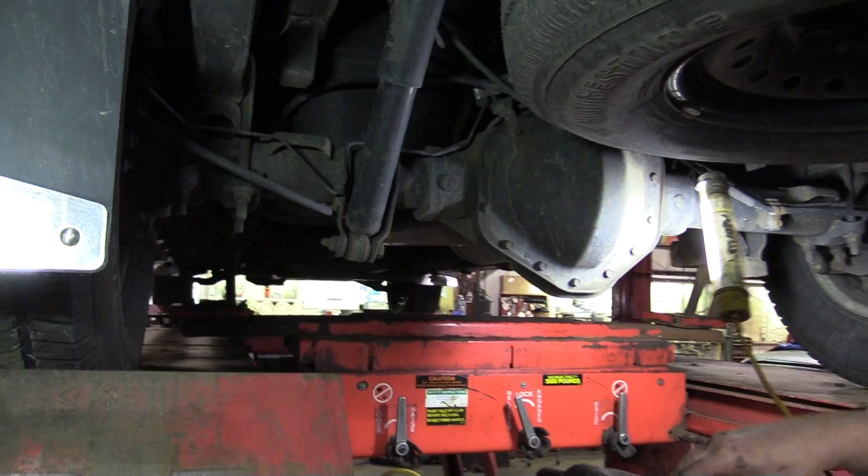All right, so we're knocking the rear shocks off first. Then the plan is we're going to jack up under the leaf spring itself to just raise it up off of the top of the rear axle.

We've had come-alongs before. When I had aluminum lifts on my Blazer, it rotted away from the steel. I went to give it gas one day at a red light, and the tire went right up into the quarter panel, and it was hard to get apart. I had to get a come-along and pull it back forward, you know what I mean, to get it together. So the less it moves, the better.

But we have to reuse these shock bolts too, right? Yes, okay.

They've all come out pretty well. Yeah, everything's been pretty nice. It seems to have a little dead spot. The spare tire's in the way a little bit.

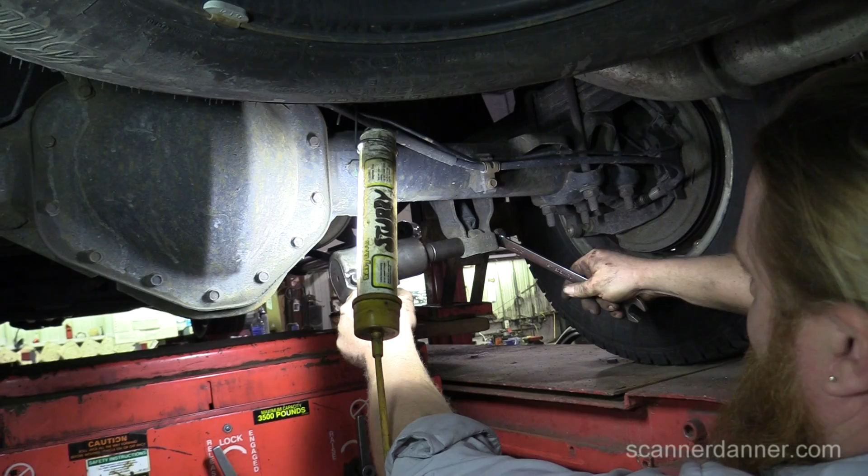I'll let Paul get the hard ones. The ones up top? Yeah. No way, I'm cameraman.

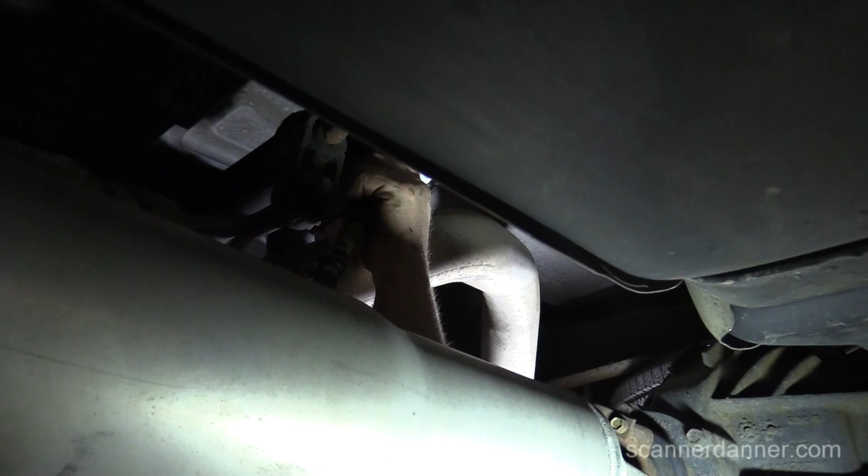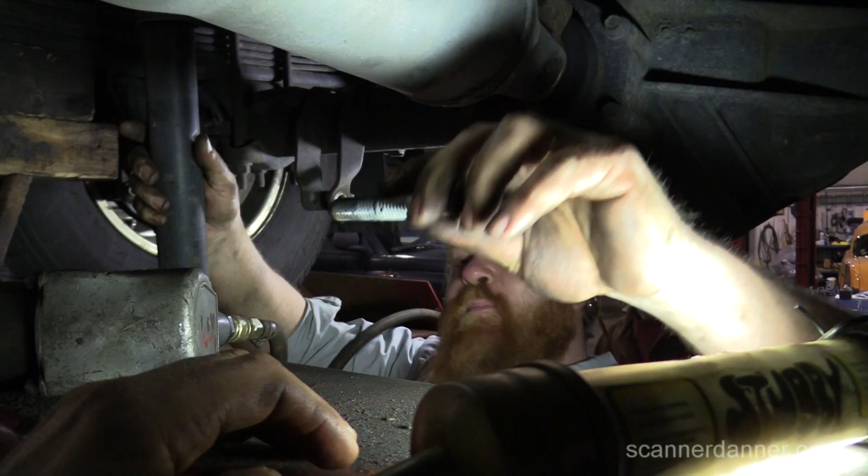I would hate to do this in my driveway. You know how long you'd be wrenching up there, especially with that much thread. Yeah, but your truck's not really that rusty.

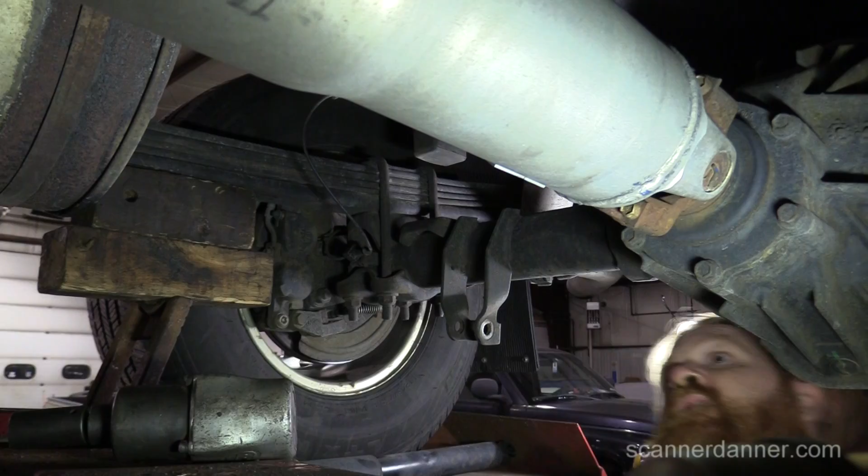Well, I've been treated with a suggestion from a friend of mine, which is you mix linseed oil and diesel fuel, and you spray the whole undercarriage before winter. I only did that once so far. Linseed oil? Yeah, linseed oil, it's like a wood oil treatment. Can you see it? Yeah, kind of, I can see you contorting yourself. There's dirt falling in my eye.

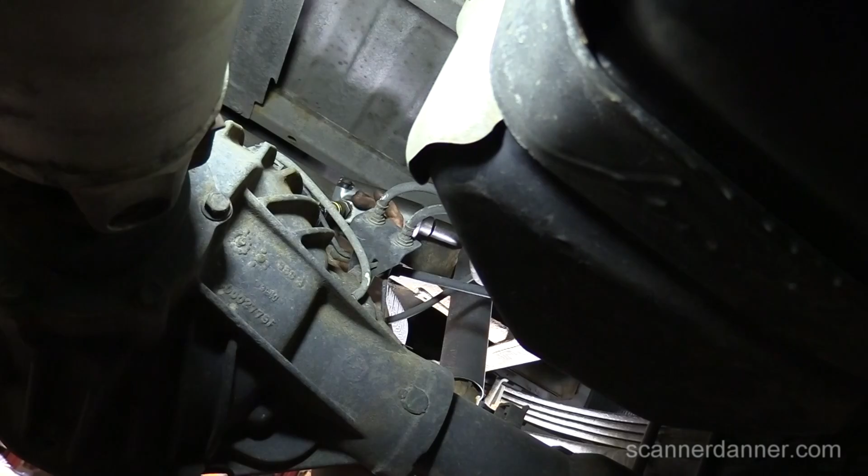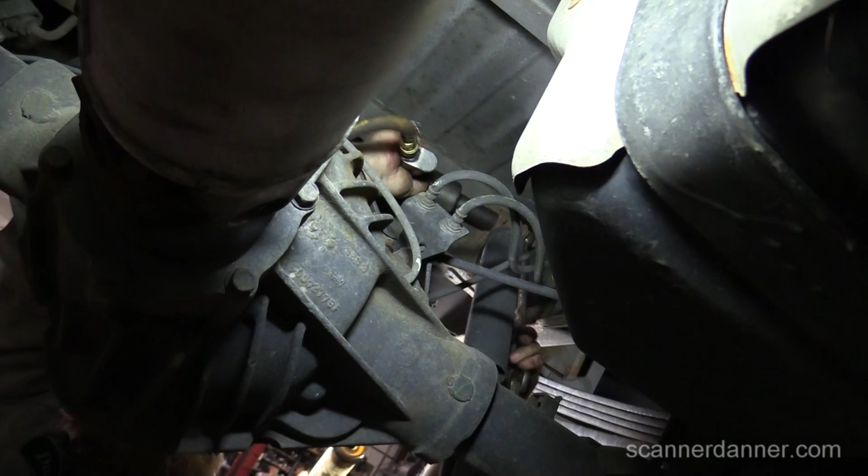You're very skilled. Yes. If I could squeeze that. Sweet, yeah, I'll let you put them in then. How's that? Nah, you're doing such a good job. There you go, but look.

Yeah, Chevy has dust boots on there. Yeah, but they're open at the bottom. Oh, they're not the bellows. So the difference is the bellows, you got to use those. I gotcha, yeah, they're too tight. Yeah, they keep the moisture out.

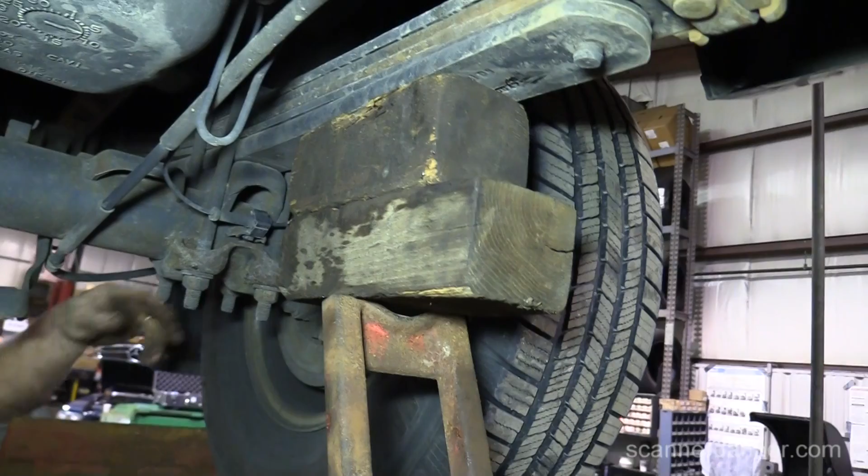So next step, again, you can see the setup we have here. We're going to do one side at a time. We're going to take the weight up off of the spring. You said you wanted to block the tire so it doesn't move? I'm just going to put the wheel chocks. Yeah, we'll start with this side over here, since I have them over here, just so nothing rolls, hopefully.

You never know. But I'm curious too, before we put that block in, can you give me a tape measure reading on that block? I know it's tapered. Just curious, because it lists this as a 3-inch lift kit, and I'm pretty sure those are 2-inch blocks for the back. Can you see it over here?

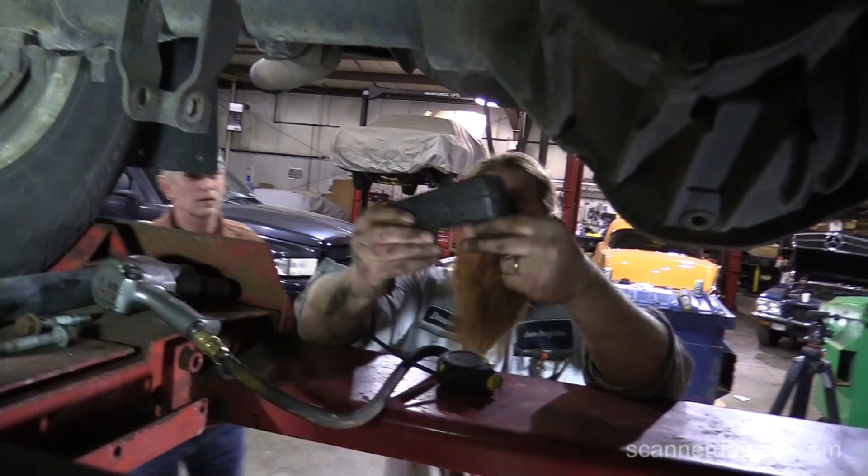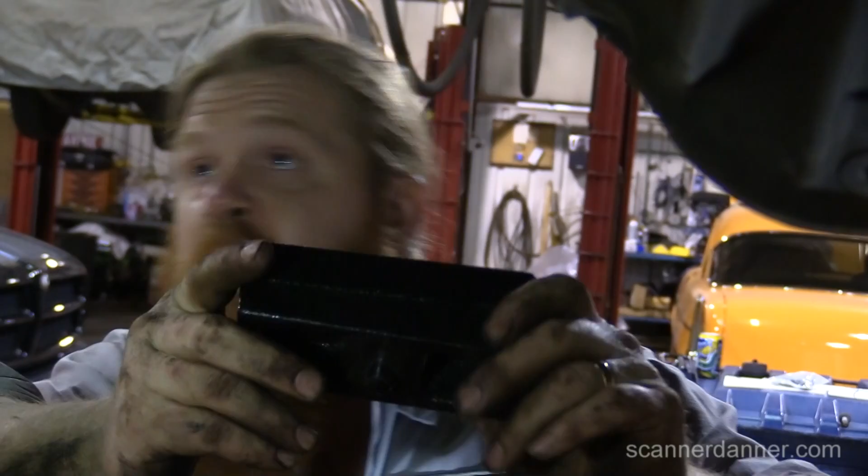Can you see good light? See how it's tapered? So I'm assuming we put them in this way so the rear end will roll up. Correct, flip it. Wouldn't it be the pinion goes down? Yeah, because you're going to have the hole, and the through bolt, the center bolt, and the leaf springs. So the narrow end goes toward the front of the vehicle, that'd be my guess, right? We'll check for sure, but yeah, because when you pinch it, it's going to roll - that's what we want, which fixes our driveline angle.

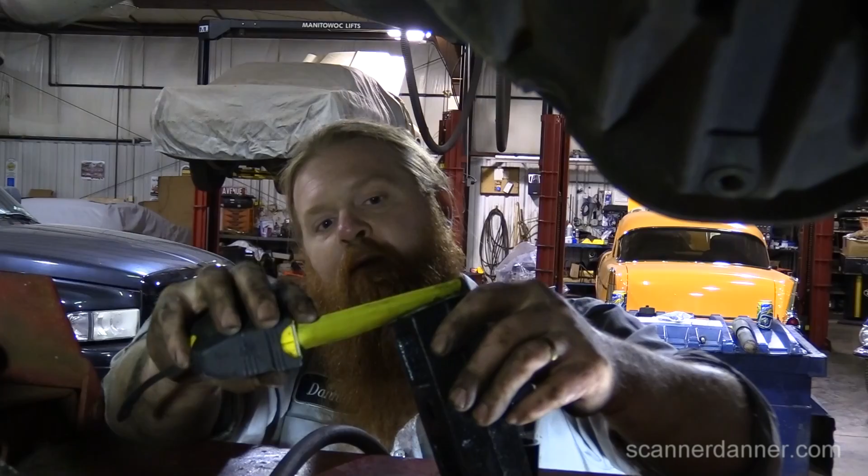So what you have here is on the short end, I'm showing 2 inches. And then maybe 2 1/4 - it's not even that much of a difference. Okay, if I get all the way to the end, I'm at 1 3/4. And on the big end, I'm at 2, maybe 2 1/8. So it's a 2-inch block. That's what I thought, and they call it a 3-inch lift kit, but it's 3 inches in the front and 2 in the rear.

See, we got new U-bolts. New bolts and everything. I don't know if they're going to be washer - we got washers too. We have all new hardware for the rear.

I remember doing U-bolts on my old Power Wagon in the driveway in the cold. Do you remember that? With a wrench. We weren't even old enough to drink either, we were just dumb kids. I would have done better with some alcohol that day.

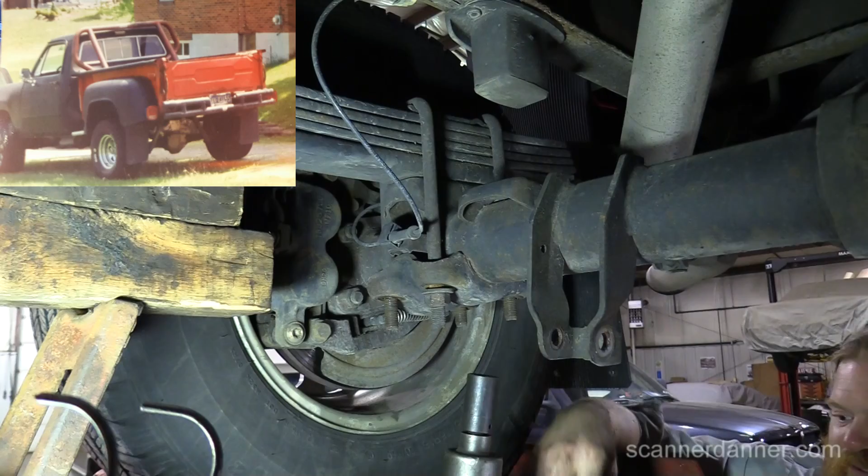We had that truck down to the frame. I know, it was sweet. I don't even know how we even lifted that cab you got from Texas or whatever. What, 5 of us? Yeah. Nowadays you'd be like 'oh man, I need this and that,' but we were just like 'it's coming from Texas, we'll do it, right?' We just pushed the other one off in the dirt, let the glass crack. Did we? I don't remember. The neighbors were like 'uh-oh.' They never thought it would run again, never thought it would get done.

So this fell off at the top - this is where the U-bolts sit up top. So I'm assuming we got to reuse... oh, that, gotcha. It goes - that just keeps them from walking. Yeah, it's a nice little channel that they sit in so they won't. So when you tighten them up, you know they're square too, because you could always think they're tight and have them sitting crooked.

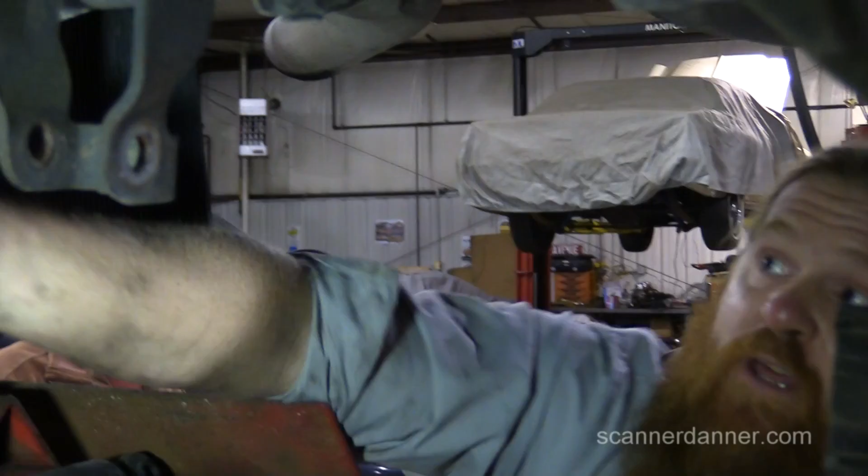Yeah, I did that on my F-150, and then like a couple miles down the road you're like, why is it shifting back?

So at this point, let's see if we have enough blocks under there to lift the... so we're coming up now with the jack. I don't even know if... maybe I want to take this one off and just lift the one side, but we'll see what happens.

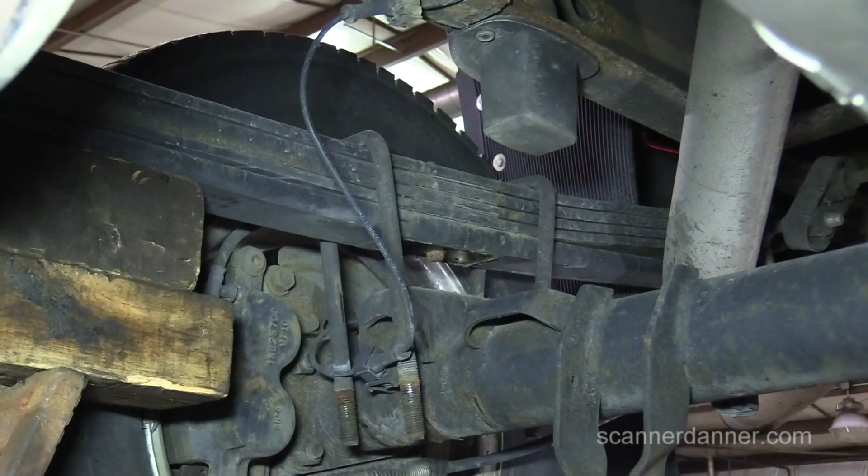It's coming up, I like it. How's our blocks looking? They're not going to come flying out. And keep your fingers when you put that block in there - just make sure you film it. I got it, man, you break your fingers, we'll have it on ScannerDanner.com, film.

I think you got to go up a little more. Yeah, you might want to. Yeah, it looks good, that looks great. That'll go, that's good, that'll play.

So we have the center bolt here. Keep your thumb out of there. I have to put it there. Well, just as little as possible. Then these things don't have to be here because we're putting new ones on.

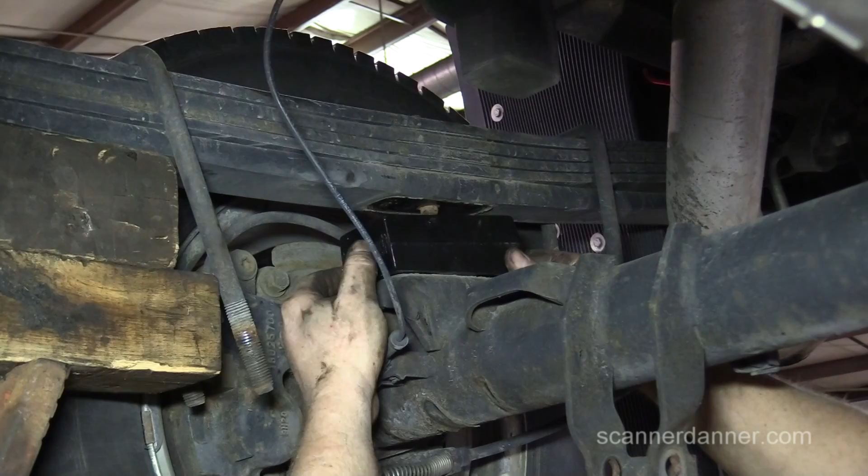So if the fat end fits in, I'm high enough, right? You're not going to see it unless you want me to grab the camera. No, you're good, but there's a hole. Yeah, absolutely, we can see it. There's a hole that sits down in on the perch, and then when I lower it down, we want this part to sit flush. So we might have a little bit of prying to do, because it looks like if I go straight up, I miss it. A little bit of prying to do, but I got the thick end in the back, right? Thick end in the back.

So that's that. Now I can lower this down a little bit. That looks like it's dropping right in there.

It doesn't seem like... it might be, we'll see. Yeah, it's not. No? I needed like a... yeah, it is. It was in. No, it's not flush. Oh, I see it.

It's like, give me a hammer. If I give it a tap, it might just seat. I don't want to put too much weight on it. If not, I'll get a pry bar.

There's a dead blow, orange handled hammer. Yeah, a hammer, maybe that's why. So hit it right here - don't hit the ABS wire. Yeah, just make sure you perfectly hit it right against that jounce part.

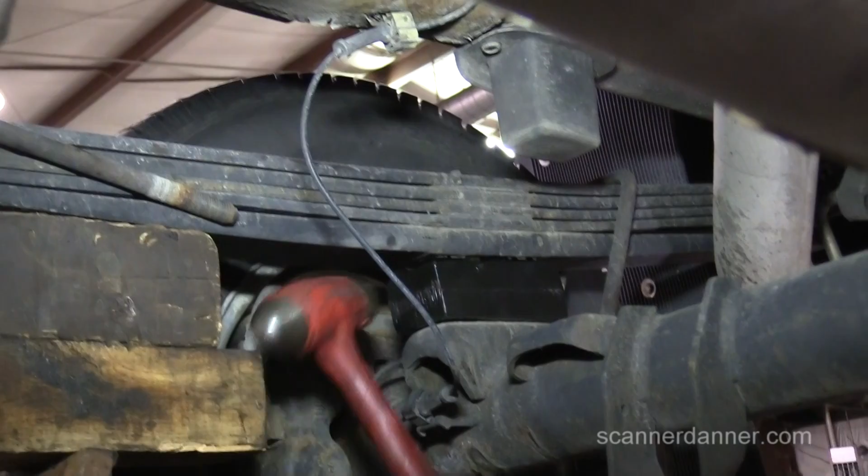I think that might... there you go, nice. No, is that... you want it to be square? Yeah, do we want to double check that the tapered end goes toward the front? Now would be the time before we...

Yeah, I'm gonna let the weight down on it and then we'll go look at the instructions. I mean, you don't have to come down all the way. Leave it right there. Well, when we tighten it, I want the weight down on it, so if I can just get looseness there, I'm happy.

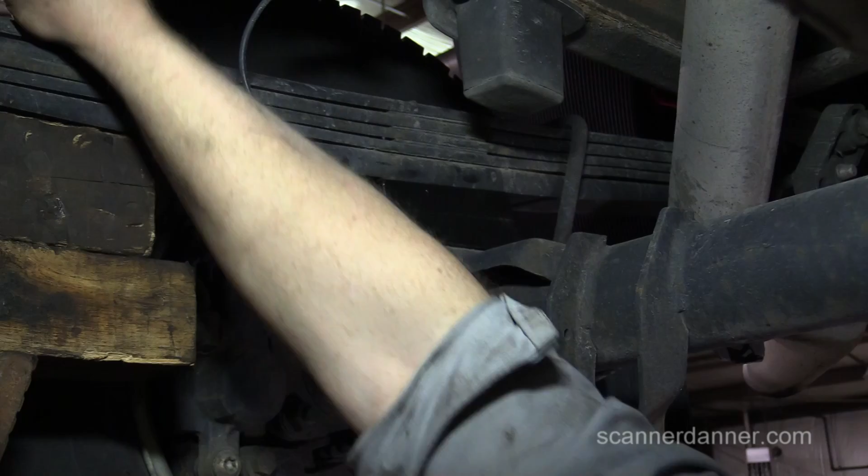I mean, if you think about the angle, when you tighten that, that's definitely going to raise the front end of that because of the tapered block, and that's going to raise your differential, which is what we want to do. So we don't need to check.

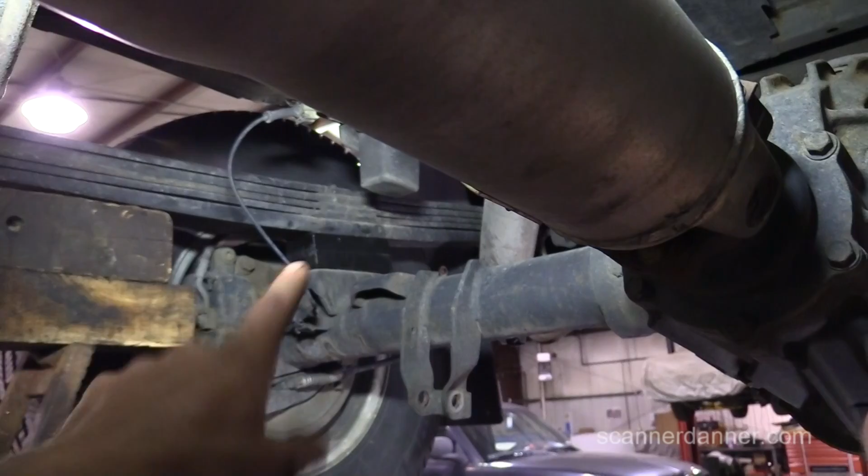That is up. Yeah, that is absolutely correct. It can't be the other way - you'd be pushing the yoke. The idea here, guys, is we want this yoke to come up a little bit, not down. And if we put the thick end on the front, that's going to take that perch and angle it this way, which is going to give you even more of a driveline angle, and that defeats the whole purpose of the tapered block. So we don't need to look.

I'm 100% confident. Me too. Put those U-bolts on. We'll look when he pauses the camera. We're 100% positive on camera.

So do they give you a torque for these? They do, it's on there. Because these things are always, you know what I mean, they're so long and they twist. I definitely would like to torque these, though, for sure.

I think it's like maybe 110 foot-pounds, I think it said. What's the instructions, I think you had it. That was just for the front. Oh, the rear's up on the alignment rack.

This thing here also has a pin, a hole in it for it to sit at the bolt end. Yeah, cool, you know what I mean? That's actually nice that they have that on there. I've never seen those before. I've seen them, but yeah, some of the older ones didn't have that kind of stuff, or else someone else had them apart and they should have been there and we didn't know.

And it's a snug fit over here. That's perfect, that's nice and tight.

My truck's going to be awesome. You got to show it with the tires on it. Yeah, well, I'll show it with the Weenie Hut Junior tires on it first.

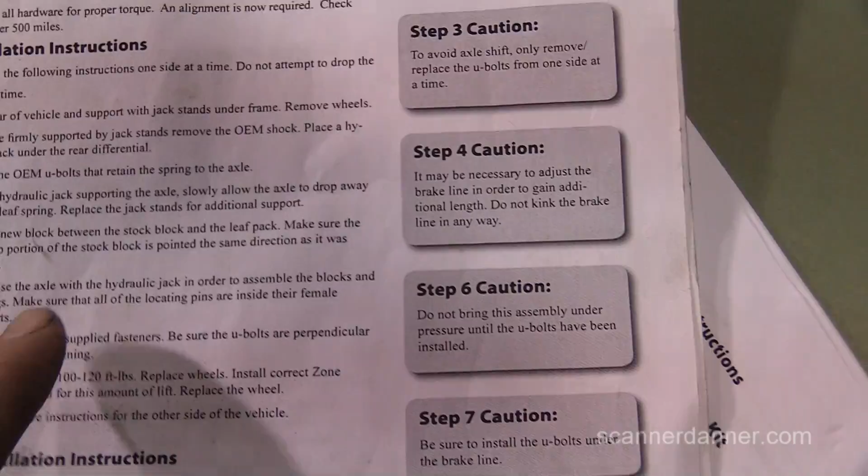If you need U-joints soon, we'll do that video and switch them. I'm going to run these down snug, we'll go do the other side and set the weight down. Do you need me to hold the U-bolts?

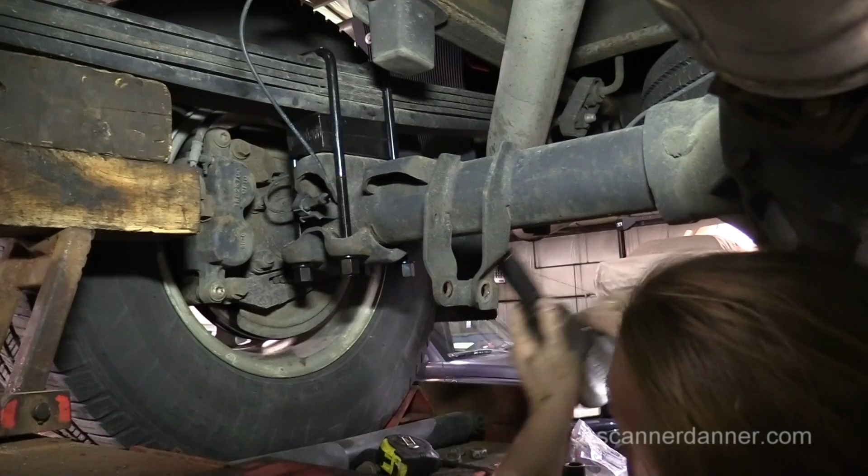If you read the directions, it tells you to drive it for a certain number of miles and recheck everything. So that's what you're going to do. But I just want to make sure I'm lining up in the grooves up here, and I'll just get this in.

Okay, I was like wait a minute, are these different lengths by chance? I think they're all the same. It would make sense that you don't have as many threads in the back, right? Yeah, because that's your 1 inch difference. It's flush here, and I didn't make it super tight yet. I was just curious, when I saw that it seemed like there might be one that was a little bit long.

So what we were just wondering is the length of the U-bolts - are they all the same? They're the same. The difference with the threads is the tapered block in the back.

There's also a little bit of geometry in play here, where since we're changing this, I can probably loosen these and let your lower perch rock to a different spot. See how I did that? Now I want to make sure I'm not too offset either, but you can see I rolled the perch back maybe an 1/8 inch.

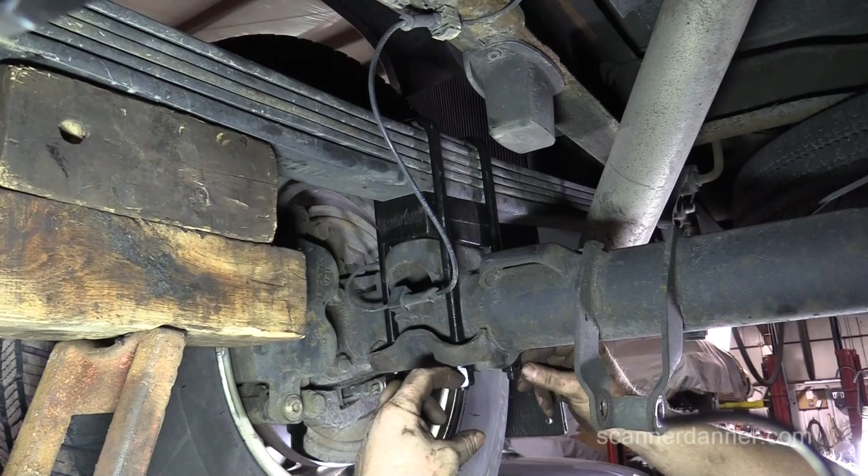At this point I'm confident it's snugging us together, so we're going to do the other side, then take all the weight off - let the truck actually sit down on the blocks, and we'll loosen them all and fine tune the angle, making sure we don't have no threads on one side and an inch on the other.

So what we're going to do at this point is the other side the same way - you guys just saw this. We're going to put the shocks on, I'm not going to film that part, then we'll get this at ride height position. Remember, we still have to tighten the lower control arms up front, because they're still loose.

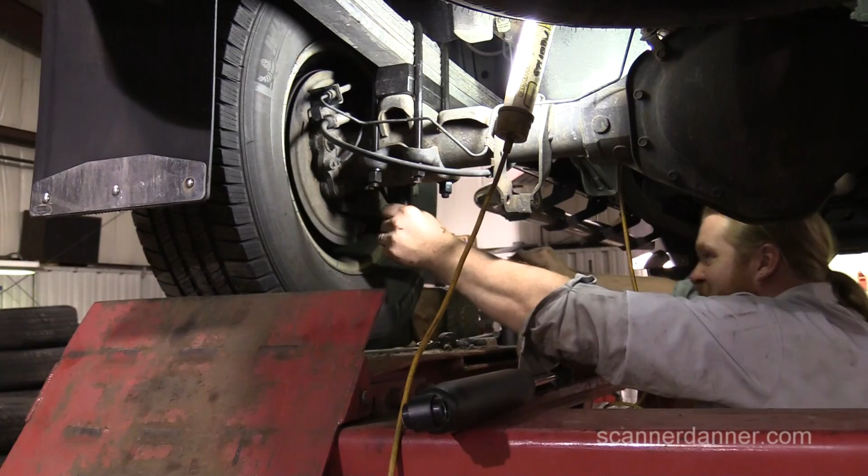So Danner wanted this part - well, just because people are going to say you never used a torque wrench on this whole job. We actually did use the torque wrench on everything, you just didn't see it.

See, when you do this long enough you develop this thing in your elbow, it's called your click elbow. If you turn your forearm - oh, you hear that? You just kind of take your forearm and turn it a little, and you can change the position of your elbow, and then you know when it's tight.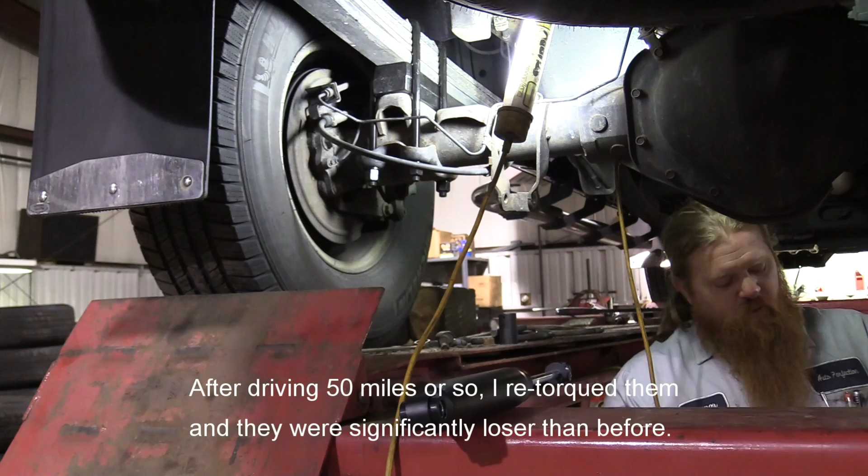And of course he's going to retorque all this. No, but the U-bolts I definitely wanted to torque just because they always feel like you can keep tightening them forever. Yeah, and you probably can until you stretch one. So I'd be curious after a trip to school and back or whatever, just to see how much they move. And you went 110, right? I think I went to 120. Okay, cool, max.

It's like jumping on there.

There you go. Cool. So that was easy. All right, rear shocks.

I'm not filming that part, it's just shocks. Question my brother had is, did I put the new shock next to the old one to see if they were longer? And you can see that they are slightly longer.

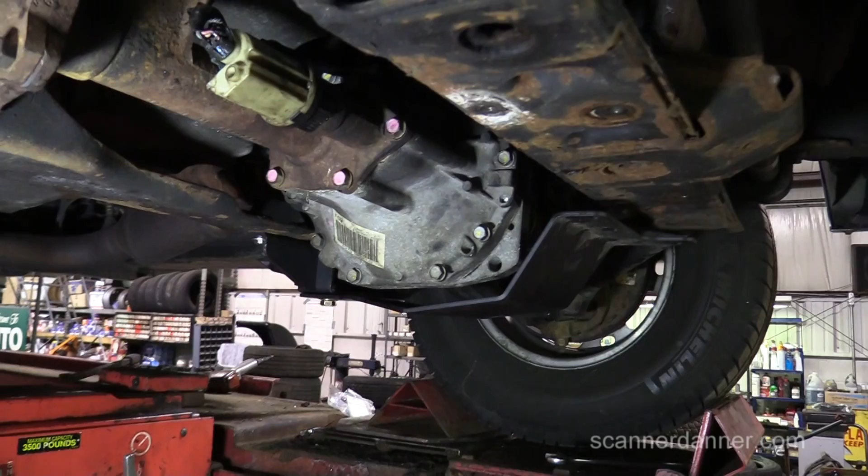All right, the last part is we're doing the skid plate in the front, and all my brother did so far is show the bolt you put in. The one in the back was threaded. No, you don't have to take it out. There's a welded nut on the inside of this bracket here.

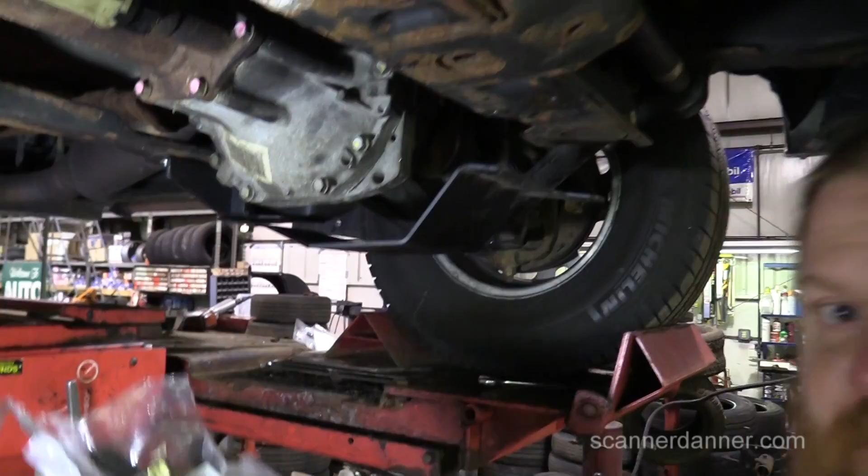Okay, but we had these left over, right? And you're like, man, you don't want to have leftover parts, but now it all makes sense. They give you that sleeve, goes in some kind of sleeve, assuming it'll go up into a spot somewhere. It had mentioned drilling something. Yeah, so we're gonna have to look at that and see. But that's gonna be for this skid shield, and then the last big bolt's gonna go into there with a washer.

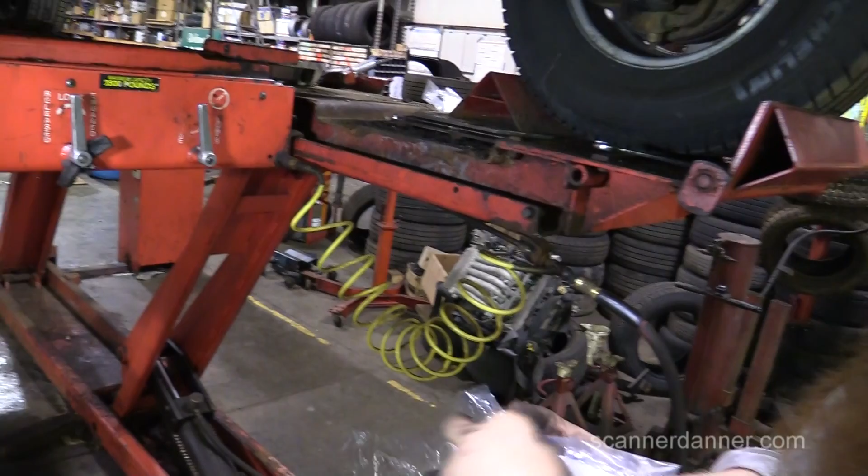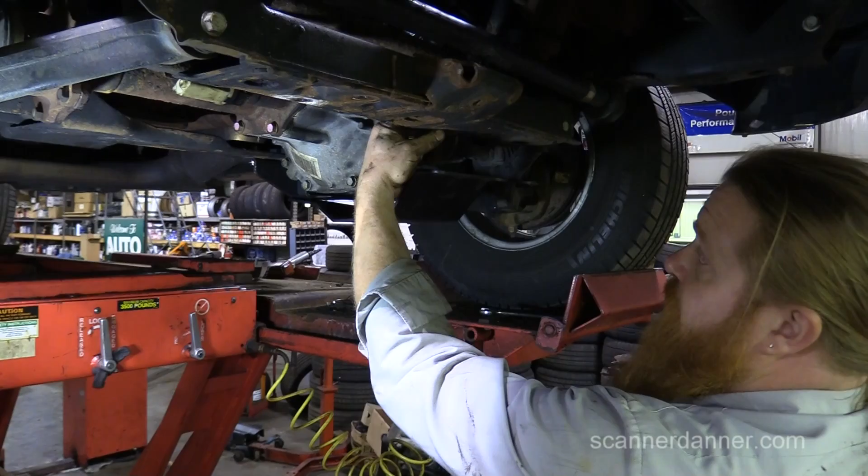And then we have 2 more nuts with 2 littler bolts that probably go through here, and they probably want us to drill through the cross member here, to actually - since we lowered the differential, right, you have a potential to actually hit it now. So they give you a nice, pretty heavy duty plate. So that's cool. And if you bolt it across the front 3 places, it's not going anywhere. It's going to take a hit before you get back far.

All right, well, I'll just leave this. Rivet nut installation tool.

It looks like they're drilling through the bracket itself. What are we drilling through there? That looks like a freshly drilled hole in that picture. What are we drilling into? Turn the page over. It looks like a piece of a triangle piece of metal.

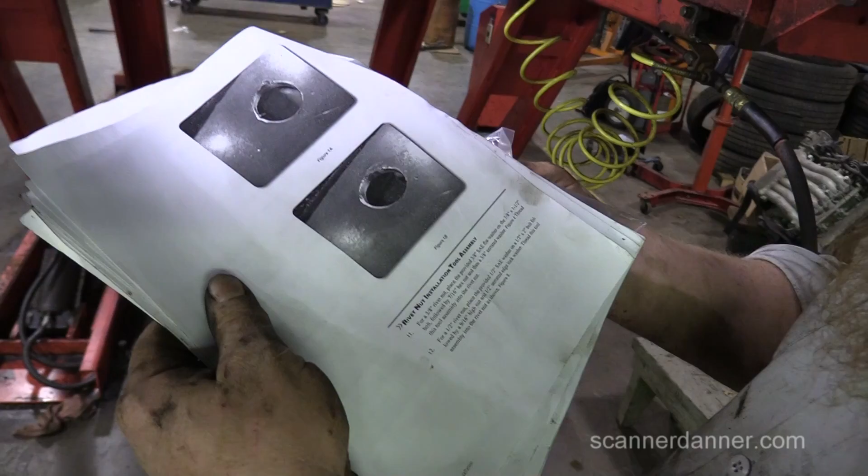Shown in figure 3. Where's figure 3? We're on like 8-1. There's another book that - no, there's figure 3. Oh, look. Yeah, what piece is that? They're saying to use a...

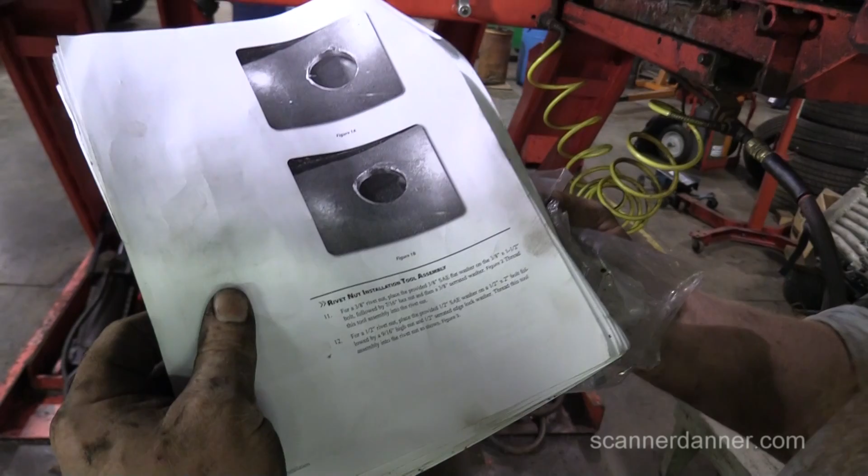9/16 high nut. They didn't give us a 9/16 high nut. Turn the page over again. Look, there was something in the - what's in the middle of that? Right there, a serrated washer, they're calling it?

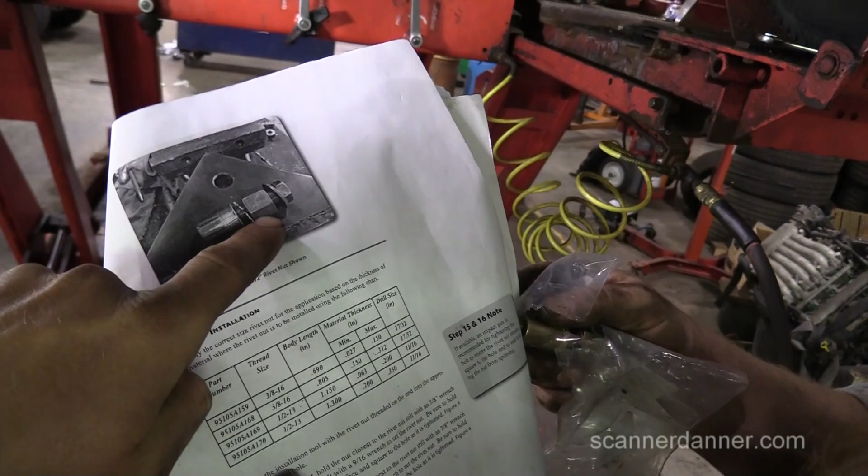No, that piece in the middle was a nut, a serrated edge lock washer. But this piece - yeah, that's that. They're talking about some 9/16 hex nut. That's to put it in, like your installation. Is that how you do it? Probably, rivet nut installation. But where are we putting that?

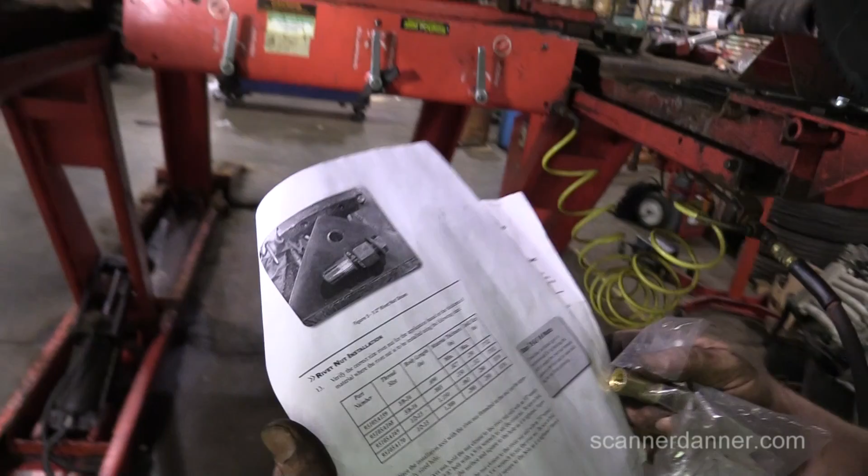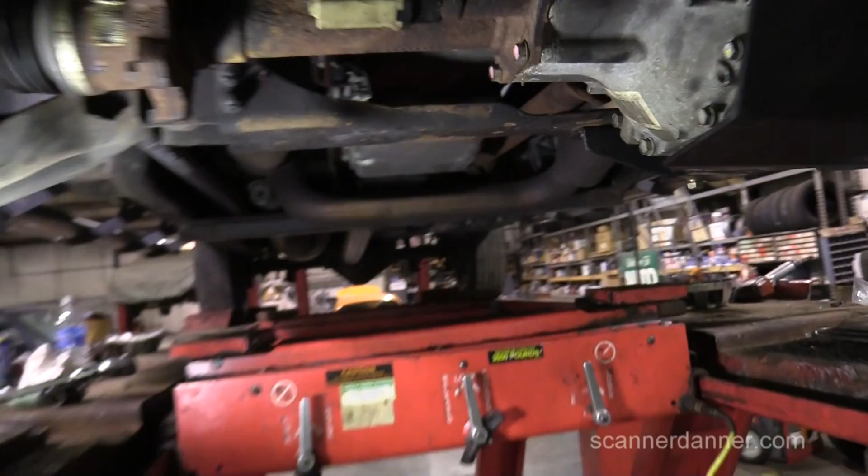So that's the installation tool? Yeah, yeah. But my question is, where? Let me show the bottom of this. Unless it crushes in this hole.

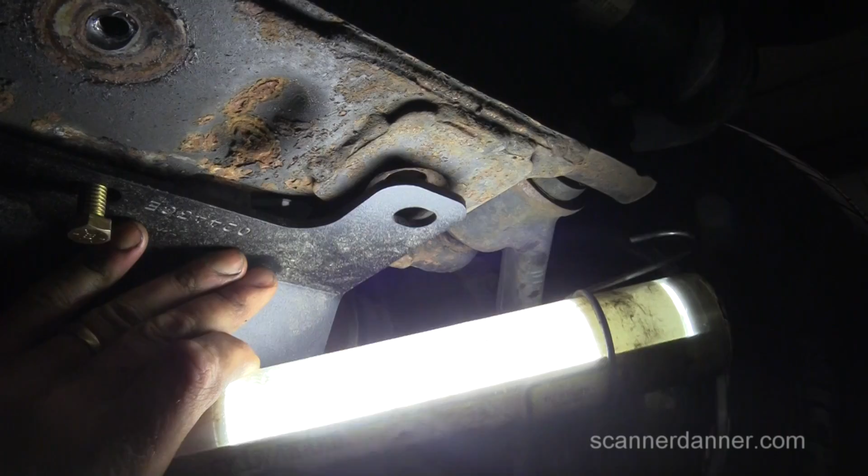Is there a chance that this thing crushes at all? No, I mean, we could just nut and bolt that. You know, it don't need a sleeve. We got that one there, one in the back. The only spot that doesn't have...

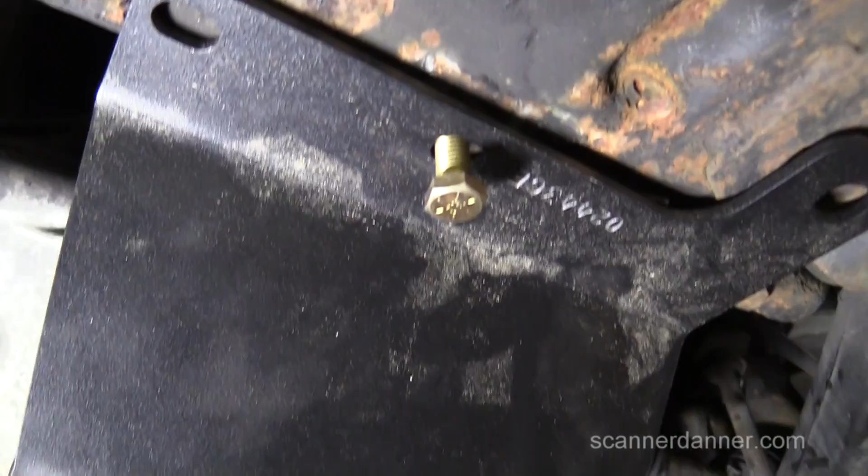Doesn't make any sense, man. That's what this stuff is for. But the only spot that there would be... oh look, here's the 9/16. This is the other stuff they were telling you to do with the rivet.

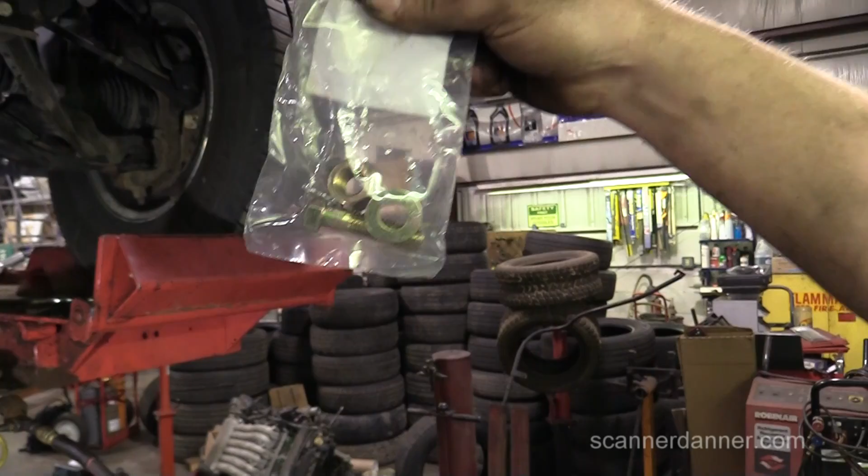Yeah, but that's the install tool. But the thing is, maybe that's for a different truck? Because look, you got one spot in the back, okay, that already has a bolt. This one here - no reason to sleeve that. We can put a nut on the other side. You could, it's just a skid plate. This one's threaded, and so then we have one hole that there's nothing.

So far, everything else has made sense once we did it right. So we just put 2 bolts in it, and don't worry about that third one. It's just a skid plate. I don't plan on doing any off-roading. Like, even that picture doesn't make sense. What is that triangle thing that they're drilling through?

Look, that bracket's even... that looks like the bracket that we put on before. That's not even for the skid plate, is it?

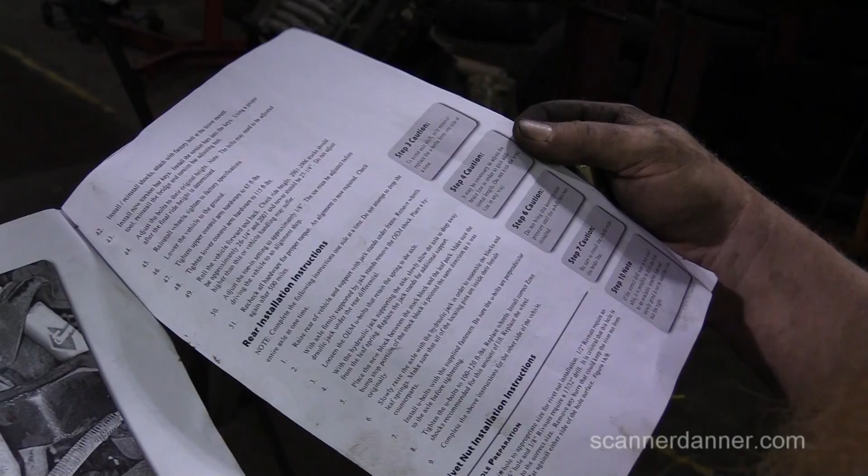Yeah, because if you go to the beginning, it says rivet nut install, drill hole. It's like after the rear installation, not even anything on the front. We're following the instructions, and we did the rear install, right? And then we got this rivet nut installation instructions, which start here. Then turn the page again.

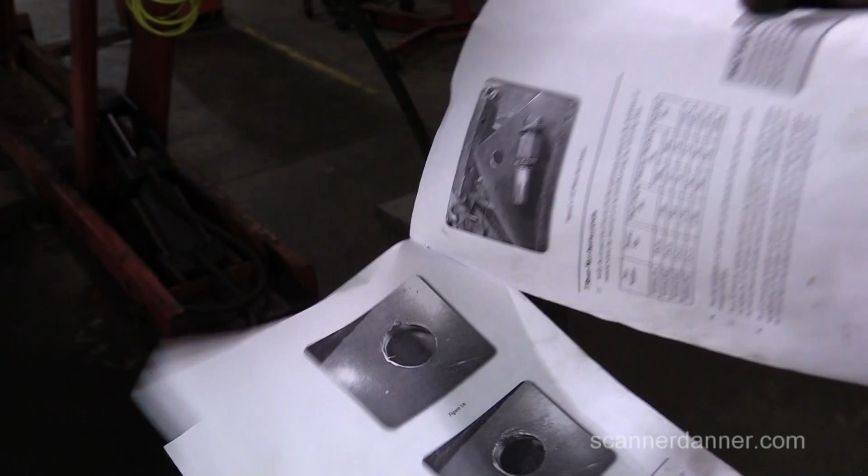I want to show the pieces they're showing. We're not sure what we're drilling. It tells you what to drill, and then shows this - it's just a triangle. One more page over, they're showing that's just a triangle piece of metal. That's not the bracket that we put on for the control arm, because he's in a vise right here. That's just a triangle piece of metal. So what are you doing that for?

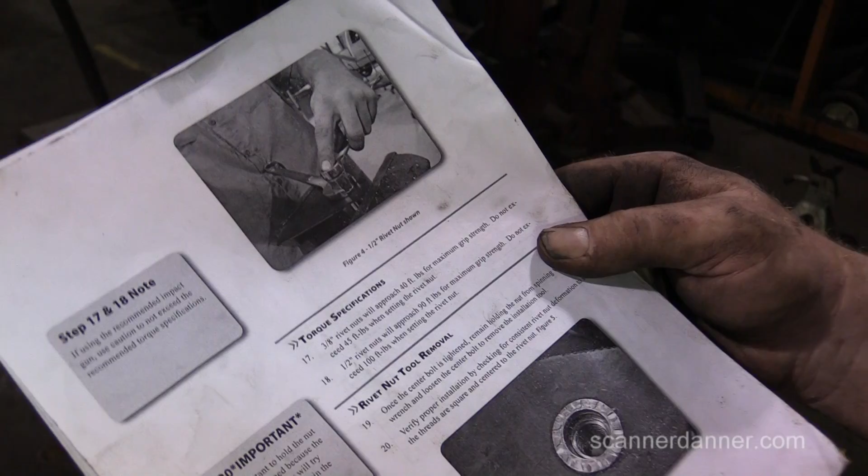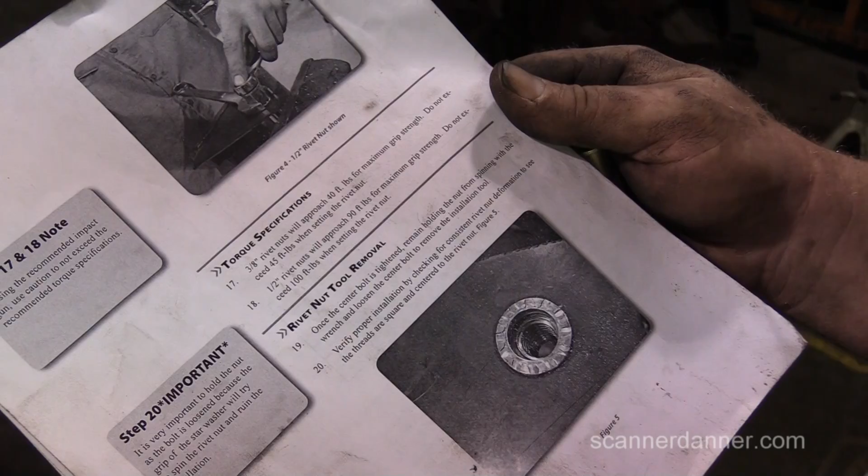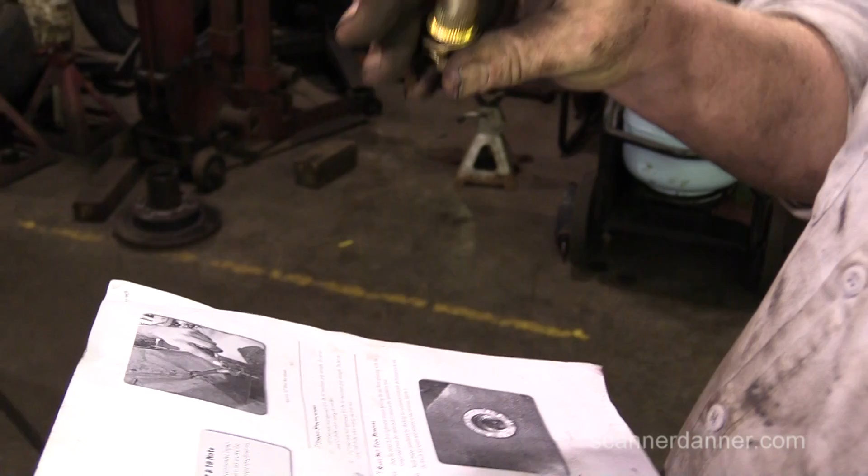Hold the nut and bolt. That wouldn't be for the hole we drilled for that control arm mount. No, because that was in a different package anyway. Yeah, and that was easy to nut and bolt. Why would you want to use a brass rivet nut? You would want that to be pinched together. This is like made to just hold a shield together.

Well, look, I'm not worried about it. We're gonna bolt this up.

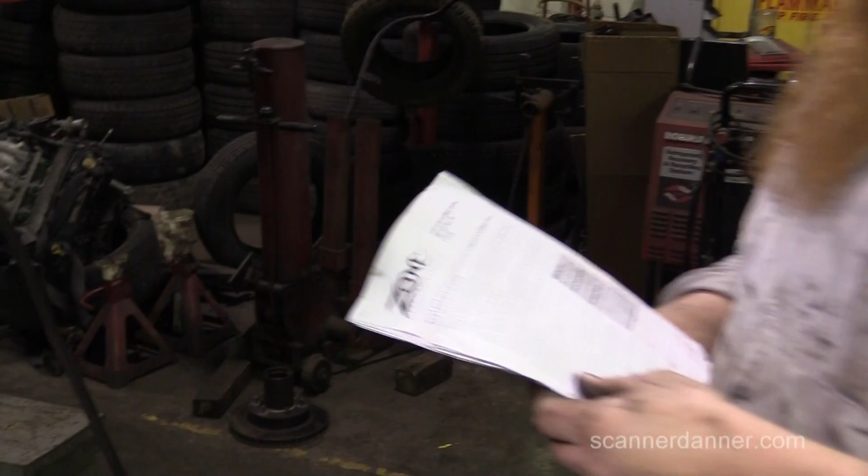This is where you leave it open to your audience. Have you ever done this before? Leave it open to Zone. Actually, the people from Zone or from... what did I say? Is it Rocky Mountain? Come on, man.

Well, this would be something for the people from Zone to answer, if they watch this. But I'm not worried about it. Let's bolt this up the way it is and be done with it. We still have an alignment to do.

Oh, and by the way, I did torque off camera. I torqued the lower control arm bolts, and those were torqued to about 115 foot-pounds, I believe.

Here, you just put this through there, dude. Just put this up through here with the washer, and put the washer and a nut up top. You have a nut that fits that? Because I don't. Oh, really? Yeah, I was going to use this. Here, I'll use this, it's a smaller bolt. Yeah, just tighten it up. And you're in.

What's weird is they don't mention it anywhere else. I know, it just says rear rivet install, and it's not telling you for what.

Alright, let's run these up, man. You gotta...

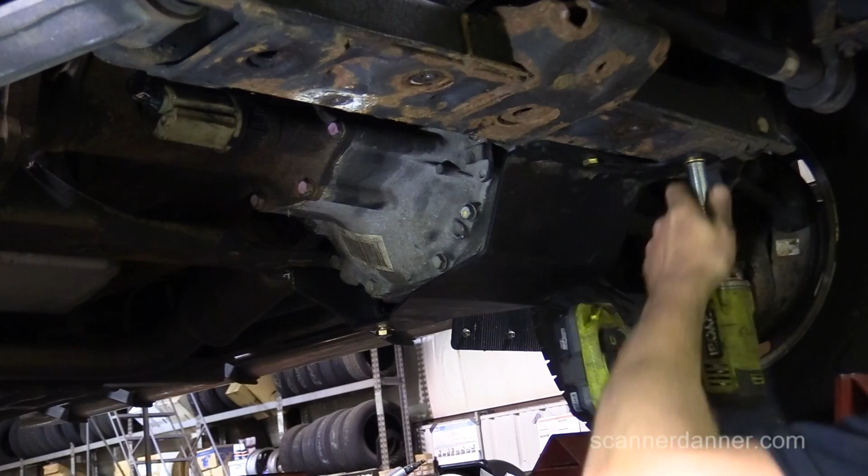Should have put a washer on that one.

I'm fine with that. There's an extra hole right here, but you'd have to drill that out. I'm not drilling it. If you were going to go off-road and bang off of that, you'd want as many bolts as you could. Sure. I'm good with it.

So then my factory skid plate then is not going to work, right? Yeah, but the front piece should work. There's definitely no way that one will work, but this piece will.

Did you plug in both ABS sensors? I did.

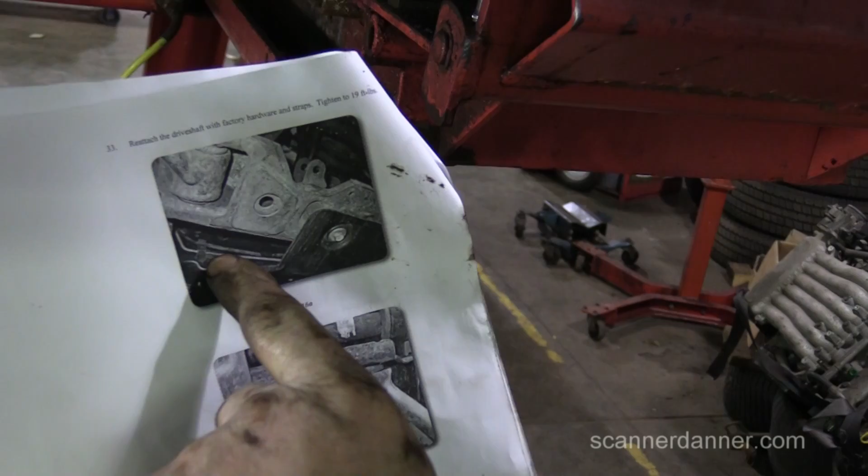Okay, here's where they're telling you to look. They're telling you here's the rivet nut, here's the front of the lower control arm. Wait, hold on, so we're showing... I'm back a little bit where it's telling me to reattach the drive shaft, and then it's talking about a rivet nut, and it's showing it. You already got this bolt in here right now. Yeah, you already have a hole in here. Right, so is that made for...

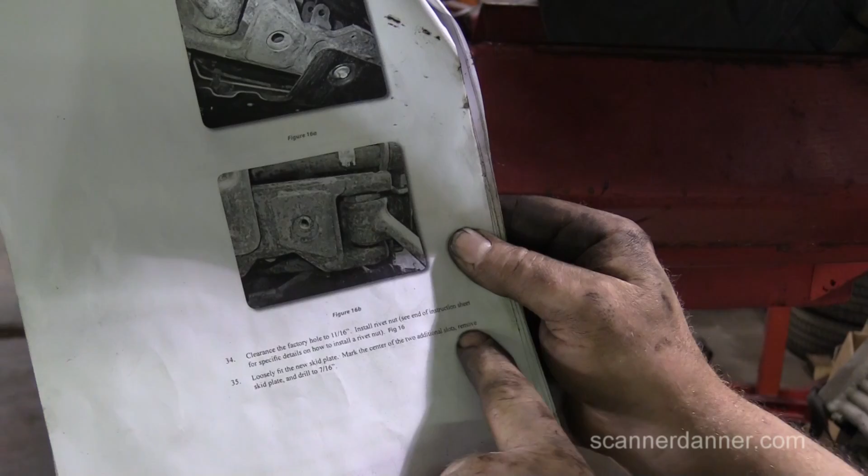It's made for the skid plate. That's what it's made for, because it says clearance the factory hole to 11/16, install rivet nut, see end of instruction sheet for specific details how to install it. And then loosely fit the new skid plate, mark the center of the 2 additional slots, remove the skid plate and drill the hole. So you already had a hole that lined up with the skid plate right here.

This already had thread. Yes, and this one has a hole that's actually bigger than that rivet nut they're talking about. So that's where the rivet nut went? It would go there, yeah. Here's that welded pocket, and here is your control arm.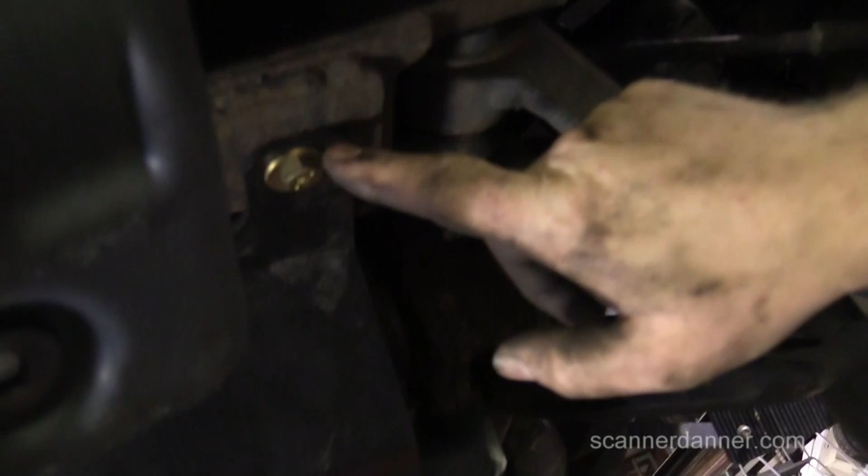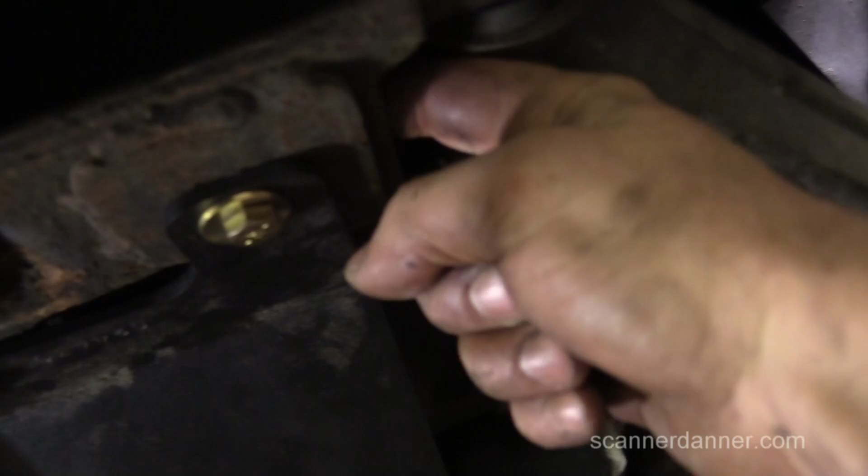And it talks about the skid plate. So this rivet, this hole was already bigger than the 11/64 or whatever they wanted you to drill, so the rivet nut would have went in there. It would have taken a heavier bolt, and I had clearance to put a nut on the other side. That's fine. At least it wasn't some other structural piece, and it has to do with the skid plate. There you go, always one in that, right? Oh, absolutely, that's the way it goes.

Now we got to figure out how we're going to rack this to the line.

Why are you taking my... did I take the impact gun? Yeah, sorry, you put everything away. Where's the chuck at? It's over there. Gotcha.

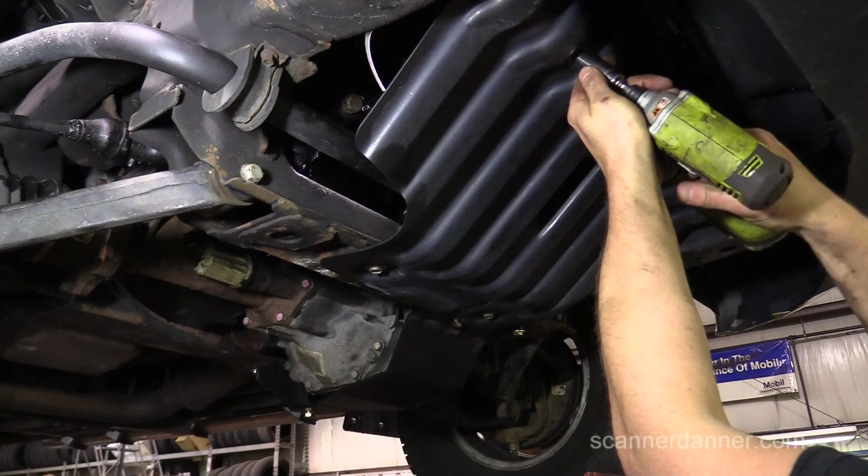Before we align this, we need to set the ride height, and we're still low in the front. I'd like to come up in the front a little bit. We'll take a tape measure and see where we are. Front camber's way off on that side, but I'll do the after photos once we set the ride height in the front.

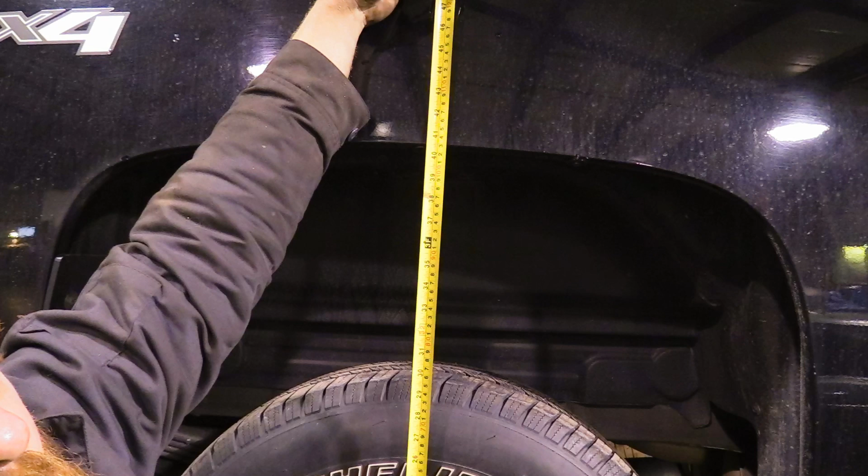All right guys, we have it set. For the rest of you, we measured from the alignment rack to the top of the fender, and we're at 43 inches in the back and 42 in the front. Compare that to the before numbers. So we have a 1-inch rake, and my torsion bars on the passenger side may have 2 threads remaining, and the driver's side is all the way up.

Now I don't know if we could back those off some and have a 2-inch rake or another half inch, but I don't want to. I like the way it's sitting, and I'll take some still shots for you guys. Let me get the live first.

My front camber's still way out on this side, but clearly I need some bigger tires now, and I have some 32-inch tires at home. We'll put those on for now.

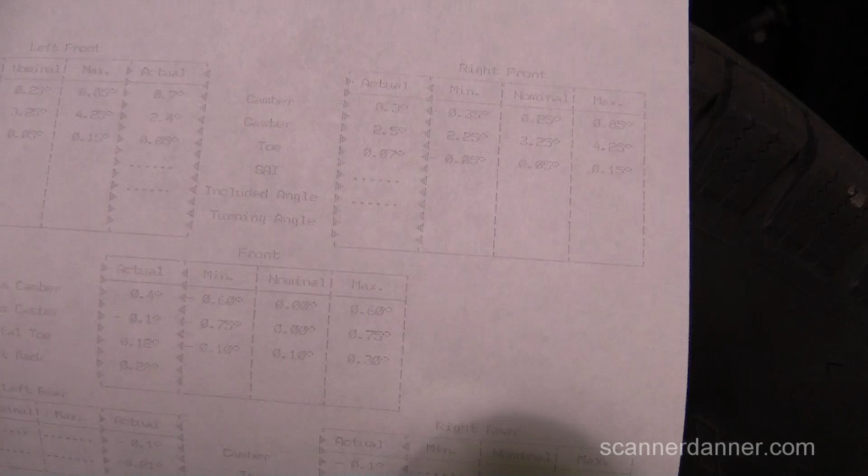Are we showing the alignment first? No, dude, that's horrible, that's dot matrix for you, man. Holy crap, I can't even see it. Yeah, I'm not gonna be able to see that. I thought you had a high def cam. I do, but there's no ink to see.

What I wanted to show you guys is where we ended up putting these control arms. If anyone follows what I did, we set from the ground to the top of the fender. In the rear we couldn't set that, the blocks brought it there—43 inches in the rear, and we set it to 42 inches exactly in the front.

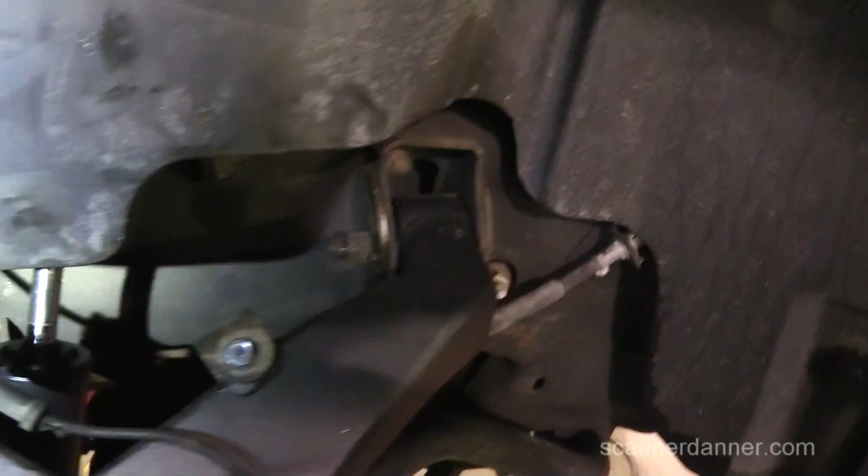You see this is the passenger side front control arm, all the way at the bottom on that one, and pretty much the exact opposite on the back side. I am all the way at the top, and that one is buried. So bury your control arm, that adjustment to the end on that one, and almost to the end on the front, and that's both sides.

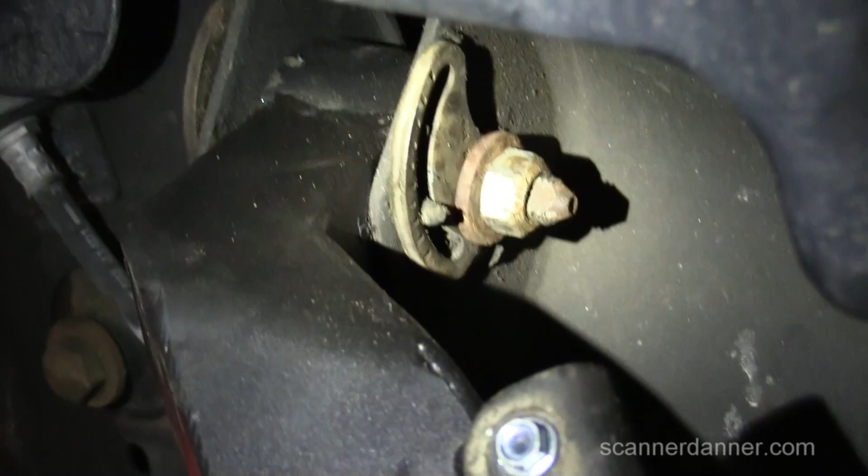Let me show you the other side. This is driver's side front, you see there's still some adjustment there. Driver's side rear, tough to pick that out, but that is all the way at the end on the driver's side rear of the upper control arm.

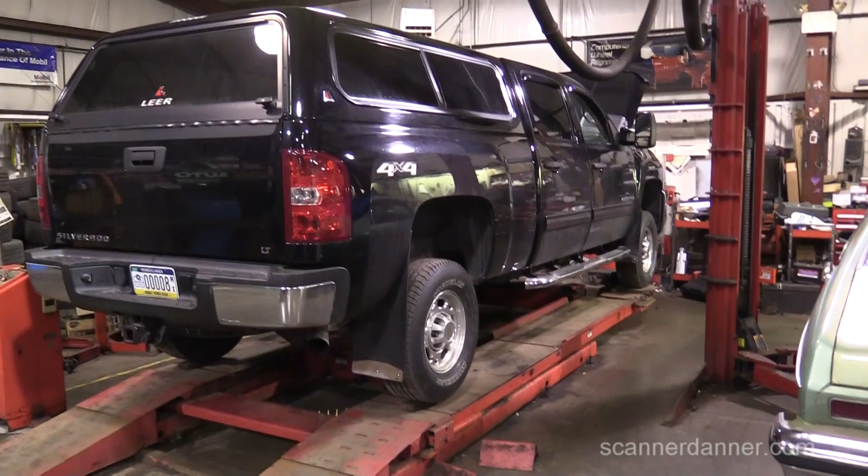No, I forgot to take pictures with it sitting like this. It looks good, man. It looks like I definitely need some bigger tires.

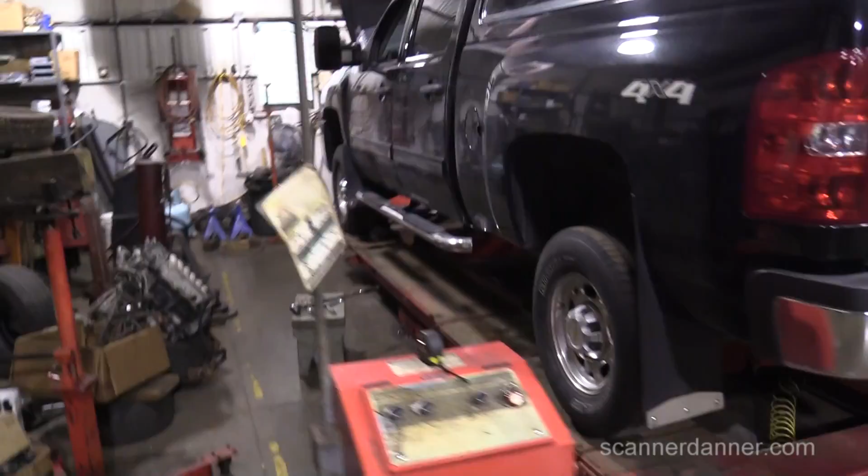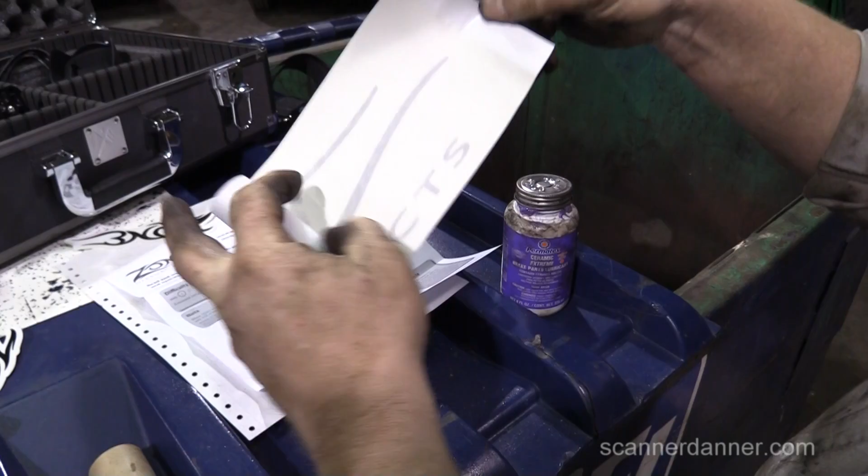Wait, where's that tube at? There were stickers in there. You gonna throw it away? What is this? Open that up, I'll put that on my back window. Gotta represent, pretty cool logo. Yeah, Zone Off-Road, yeah, we'll put that on the back window. That's pretty sweet.